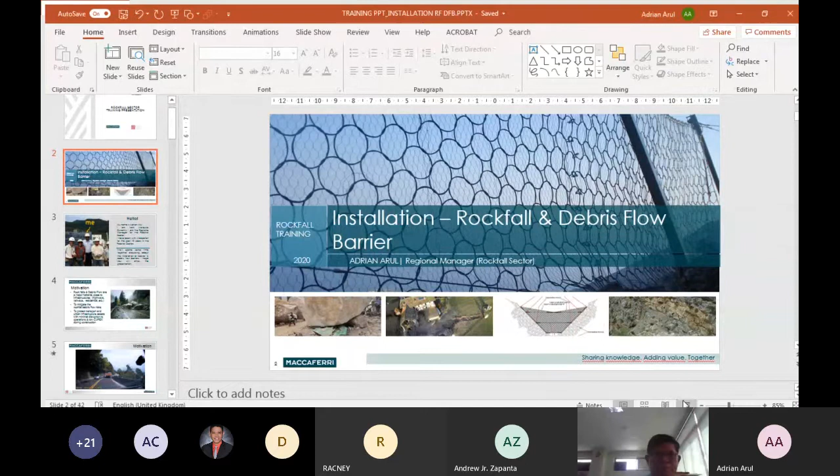Okay, can everybody hear me? Good morning to you. Yes, good morning. Okay, now I know you can hear me.

As Andrew mentioned, today I'll be presenting a Rockfall training. For some of you, this may be a refresher course, and some of you may be new to this. But the topic today is purely about installation of rockfall and debris flow barriers.

Andrew introduced me, but I'll just say a few words about myself. My name is Adrian Arul and I'm from Malaysia. I've been with Maccaferri for the past 10 years in the rockfall sector.

Today, as mentioned earlier, we'll be discussing the installation of rockfall barriers and debris flow barriers. I hope you will enjoy the presentation. Feel free to ask any questions, and I will answer them to the best of my knowledge.

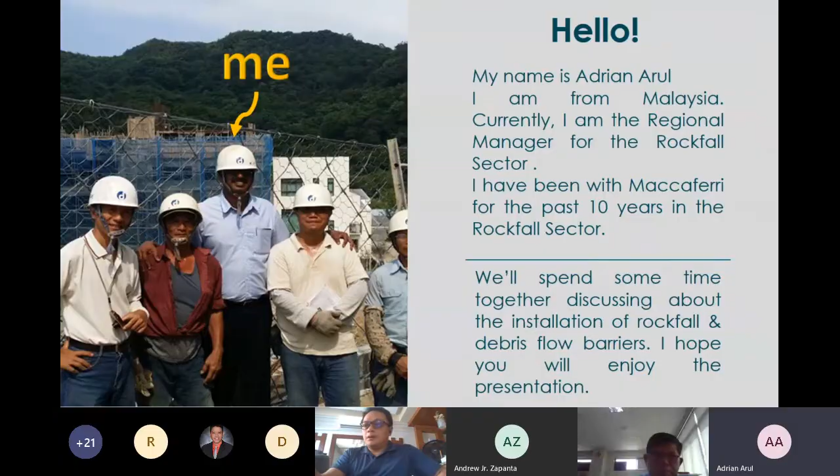Firstly, some introduction: what is the motivation for us to install rockfall and debris flow barriers? Basically, mainly it's to protect infrastructure, especially in hilly areas such as highways, railways, and also urban areas and urban development. The purpose of rockfall and debris flow barriers is to mitigate the risk and protect the transport and urban infrastructure assets. If we use debris flow and rockfall barriers, basically it is a kit, so you will have minimal disruption to your operations with this kind of solution. And this kind of solution provides low capital cost expenditure compared to other rockfall solutions, especially during construction.

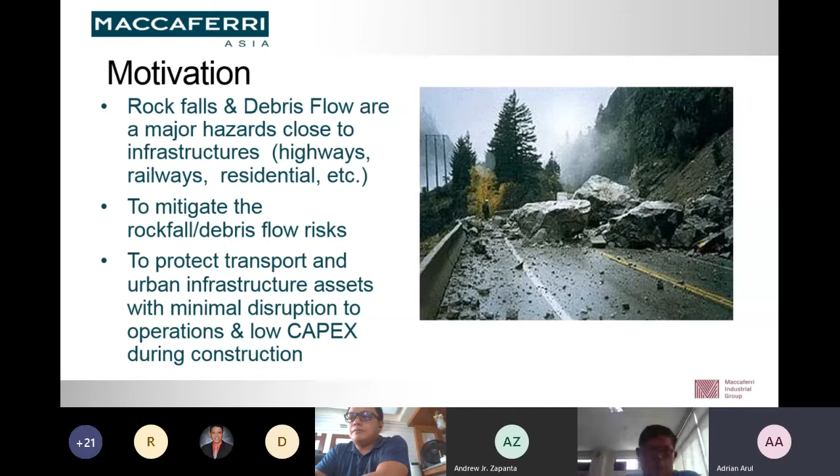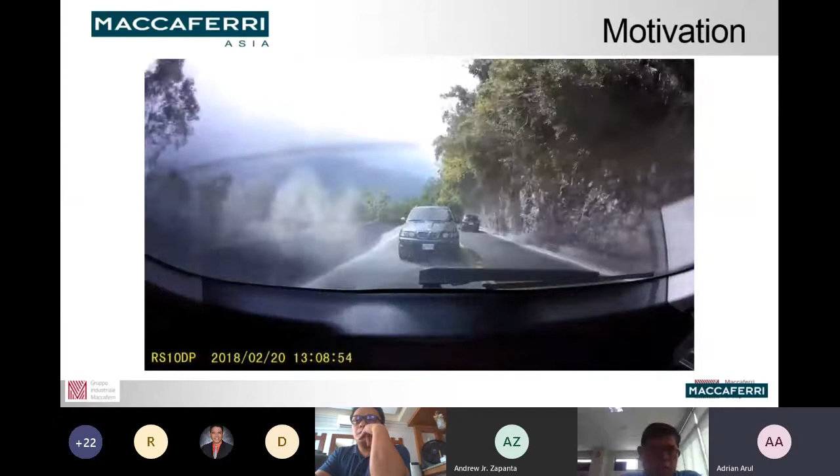Now, I think many of us may not have first-hand experience with rockfall incidents, so I thought I'd give you a video of an online rockfall experience. This is actually a video from Taiwan. You see, this is a rockfall incident. This is a near miss - luckily nobody got hurt in this incident. This area is actually prone to rockfall.

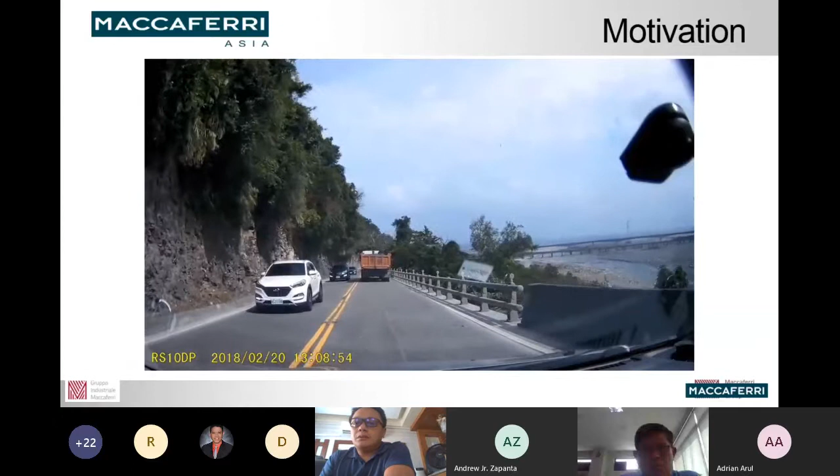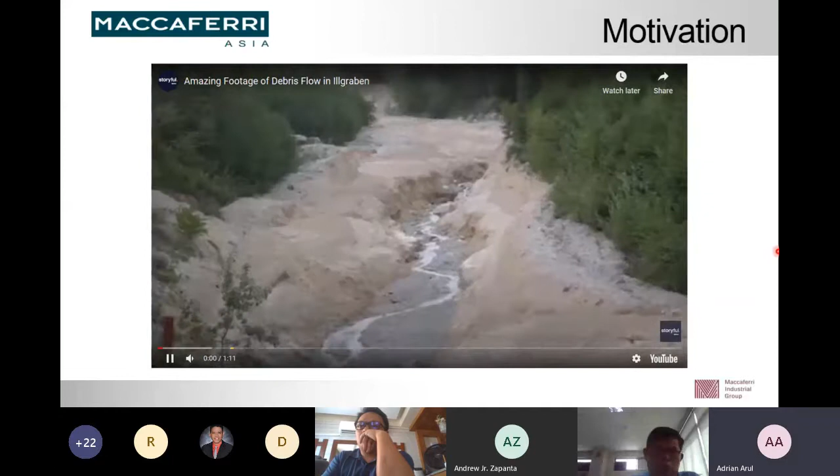This is a YouTube video that shows how debris flow looks like.

So there's a couple of things I want to highlight before I start my presentation. The presentation is based on the following premise: firstly, we cover the best practices for installation of rockfall barriers, which applies only to Maccaferri rockfall barriers. Number two, there are different types of Maccaferri barriers, meaning different energy levels. We have barriers from an energy level of 100 kilojoules, which is our lowest, right up to 8,500 kilojoules. Each barrier has a different makeup and different components, so it's not possible to go through them one by one since there are so many components and configurations.

But we can always refer to our installation manual as a guide on how to install. So the installation recommendations presented today are basically a general concept based on the experience we've had throughout these years.

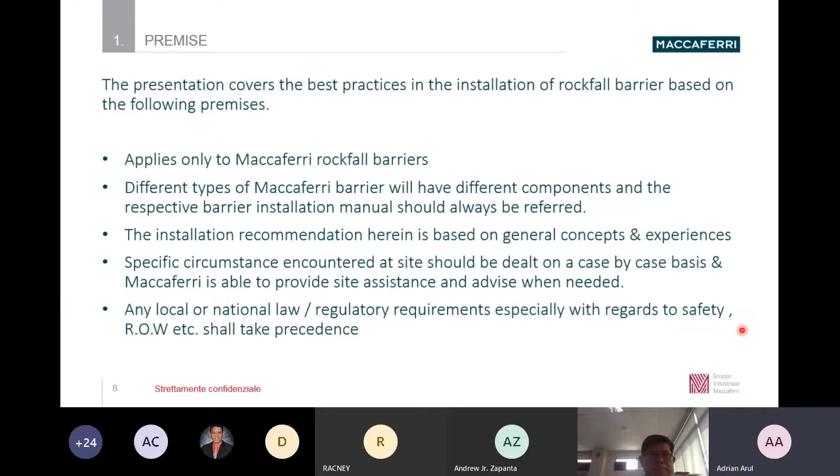Now, the first thing I would like to emphasize is safety during installation. There are a lot of safety issues, right? I've just taken some important ones that are usually encountered at site. Number one, we should always have a qualified person supervising the installation. At least the person should be well read on the installation manual, which will be given on request to the installers. Please read this carefully and take cognizance of all the important points that have been highlighted in the installation manual.

Number two, you must take additional extra precaution, especially during tensioning and installation of ropes. This is a very important part of the installation. Please make sure no persons not involved in the tensioning works are within the hazard area.

Number three, removal of tension parts shall always be avoided. For example, you have ropes and you are tensioning them, then installing the wire rope grips on the ropes. Once you install it, please do not try to open it again. That is a very dangerous thing to do. So always try to get the job done right the first time.

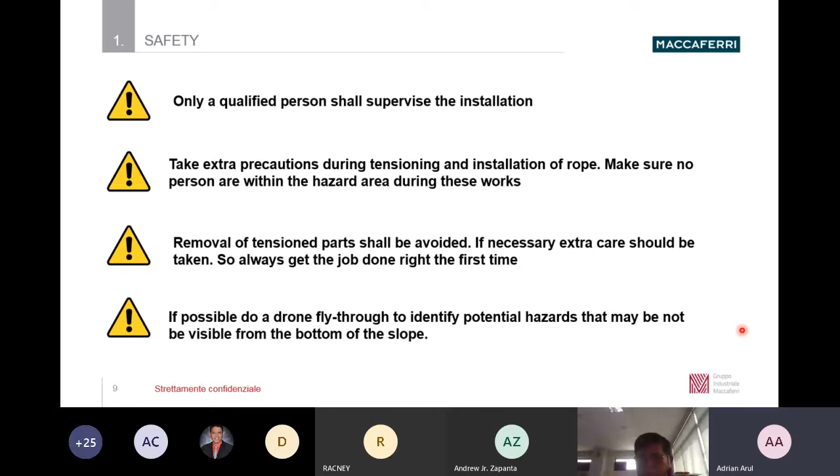Another thing, if possible, usually you will install your rockfall barrier near the toe of the slope. Sometimes potential hazards at the top of the slope, at the crest, are not visible from the bottom of the slope. So I advise if you have drones, please do a fly through, so that you may know if there are any dangerous rocks, boulders, or outcrops at the top, because during installation these may come down. A drone fly through gives you a visual assessment of any hazards at the top of the slope.

Now we go into the topic of the day: number one is the installation of the rockfall barrier. Basically, the general configuration of a barrier is as shown. You have support cables, longitudinal cables, upper and lower longitudinal cables, and lateral cables. In some barriers, you don't have these upslope cables.

We have two kinds of barriers that don't have these upslope cables: our 100 kilojoule barrier, the RB 100 UAF model, and our 500 kilojoule barrier, the RMC 050 ICAT/2 model. These two models do not have the upslope bracing cables as I'm showing here. But the rest of the barriers, from our 1000 kilojoule right up to our 8500 kilojoule, have these upslope cables and anchors. Next, all barriers will have posts.

All rockfall barriers will have posts, and all rockfall barriers will have what we call interception screens or nets. This also varies from barrier to barrier for different energy levels. For a lower energy level, our 100 kilojoule barrier uses just wire mesh. Then we have our 500 kilojoule and our 750 kilojoule, which use HEA panel, a wire rope mesh, usually combined with wire mesh. Then the higher energy levels use ring net panels, combined with wire mesh.

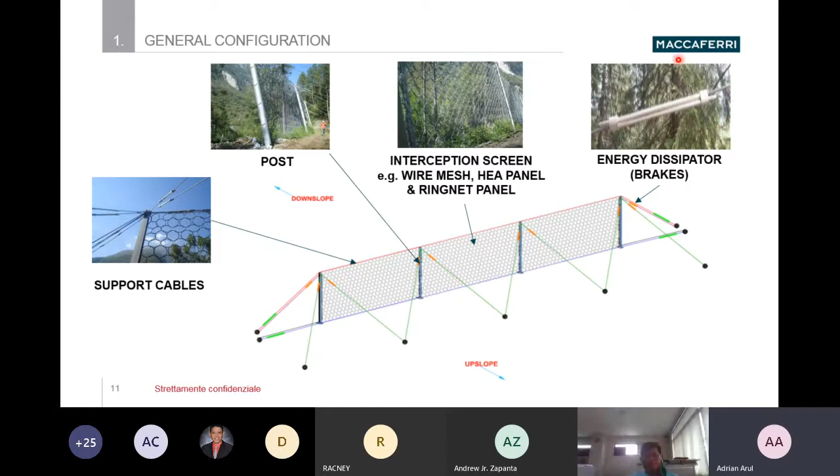Care should be taken during handling at site, because sometimes people just throw it to the side and don't take care of it, and they may damage these energy dissipators. If the energy dissipator is bent, or if there is a kink in the tube, it might not work as it's supposed to. This particular component is a very important component in our barrier.

There are two major parts of work to pay attention to when installing. One is the setting out of the anchor position and alignment of the barriers, the post position and the anchor position. Another is the installation of all the components: the post, the base plate, the ring nets, the ropes, and so on.

For the setting out, it's basically survey work, and you need certain tools. Basically a measuring tape, preferably 30 to 50 meters, a hammer, a spray can, preferably red so it's quite visible, and wooden pegs to mark out all the anchor positions and post positions at site, along with the installation manual.

The construction drawing may give you more details, like the length of the anchor that you're supposed to drill, and so on. For installation work, these are the basic tools you need.

You need a ratchet wrench. If possible, you can also use a power wrench, a socket wrench, and torque wrenches for tightening the U-clamps. Also a cable cutter, disc cutter, pliers, and an inclinometer.

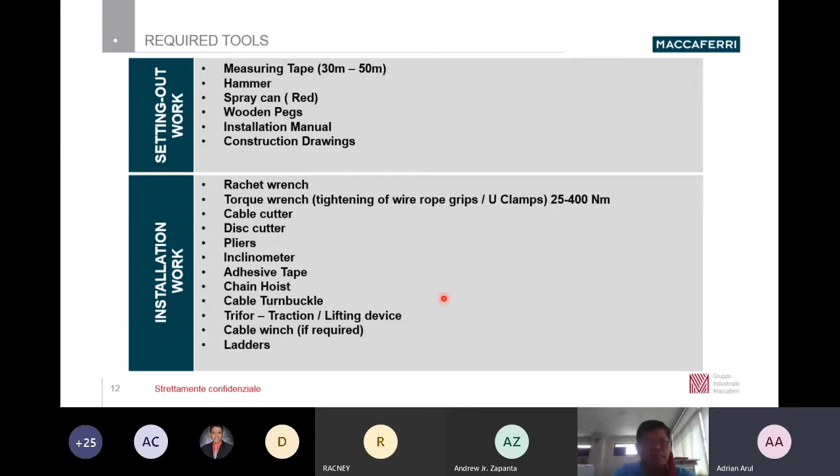You can use cable winch and ladders to fix things. I will show you some videos later about some installation.

Another issue we sometimes face is because we usually work in remote places, unloading material could be a problem. Sometimes you can use a lorry crane to transport your materials from your factory or site office to the site, or from your storage area to the site.

You can use a lorry crane to offload the packages. You can use a crane sometimes to lift posts and heavy materials if it is within the reach of the crane.

Some use excavators, especially in terrain where they don't have proper roads and access, and they don't have the facility of a crane or lorry crane to lift up things - they use excavators.

In the last photo here, you see that sometimes they don't have excavators, and because it's a very remote place, you can have this kind of fork attachment to your backhoe or something like that. It will help you offload posts from the lorry - this could be an option for unloading material.

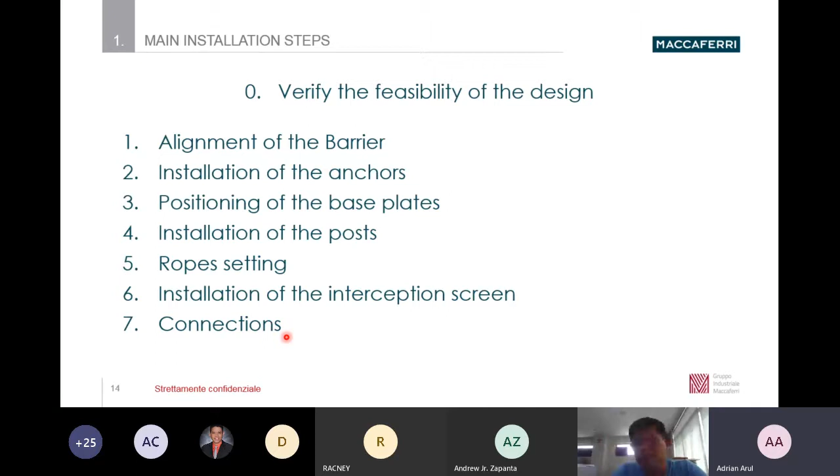Then you can install the ropes, the support ropes. Then you install the nets, the interception screen, and then you do all the connections - the U-clamp, the U-shackle, and all the accessories.

Now I'm just going to show you a video of the basic steps that I've mentioned in the previous slides.

This is our partner in Hong Kong. We have done a video with them on the installation, just to show and educate on the steps to be taken during installation. This is for a 3,000 kilojoule barrier.

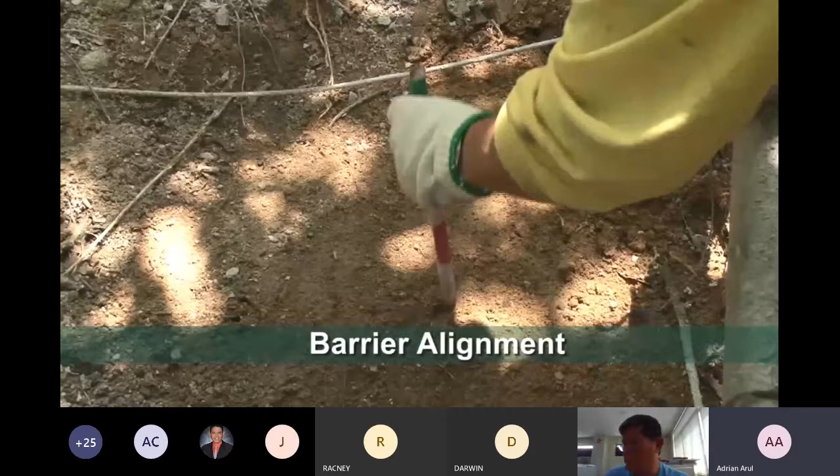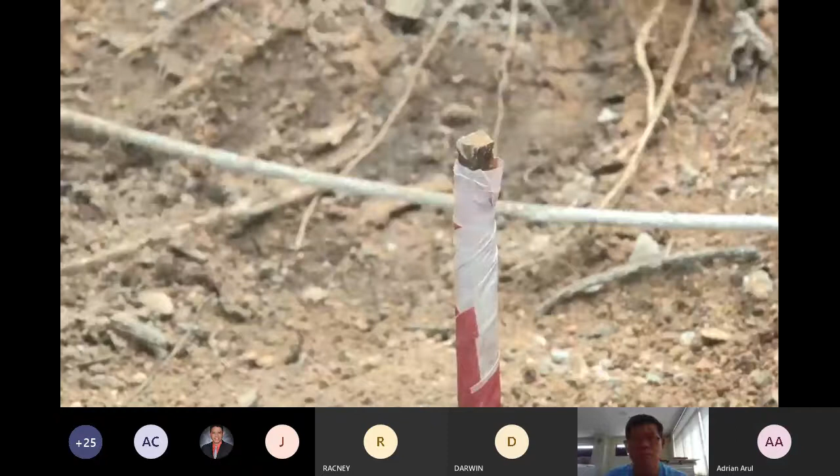So the first step is to do the alignment, mark all the positions of the posts and the anchors. Usually the post-to-post spacing is about 10 meters.

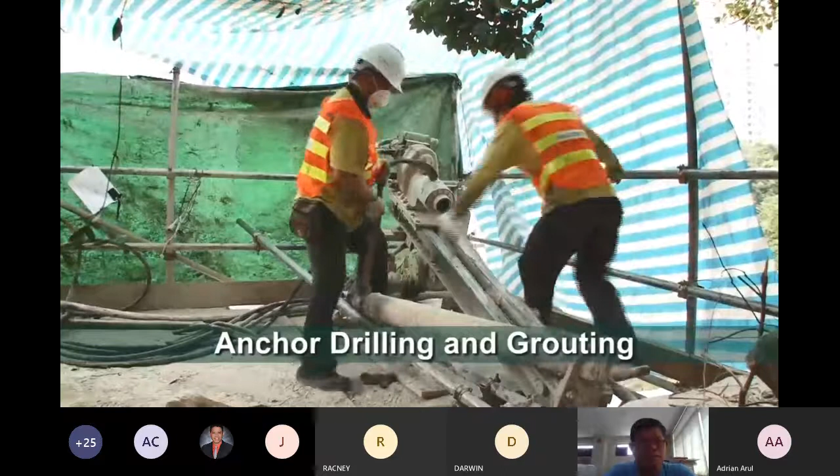This is the grouting and drilling part. They are using a down-the-hole hammer, percussion, and so on.

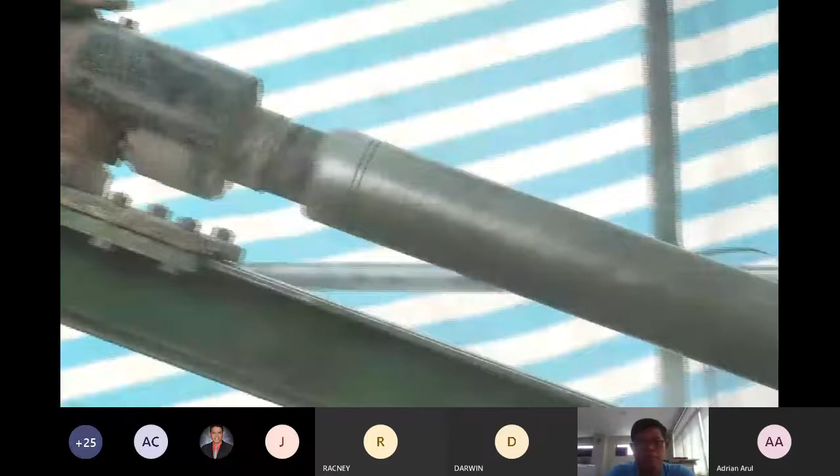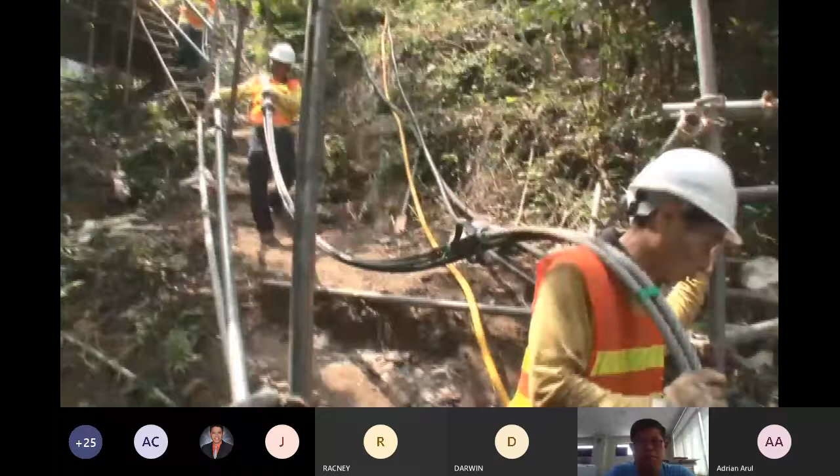This is installing the anchors and grouting anchors.

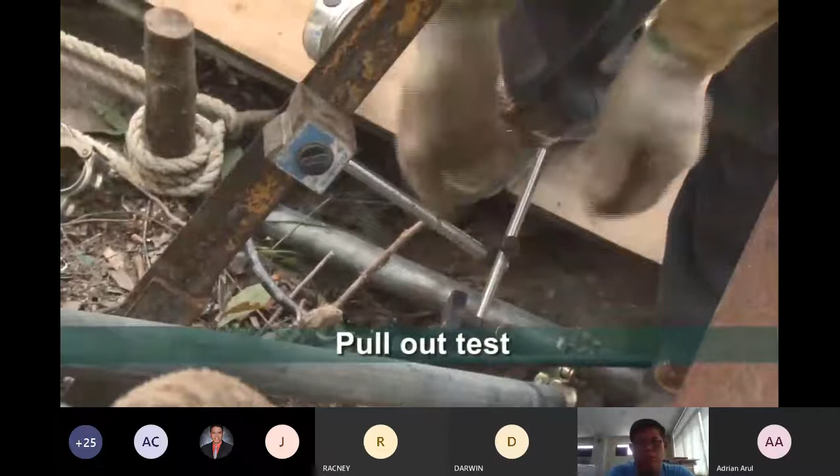Then we have the construction of the plinth.

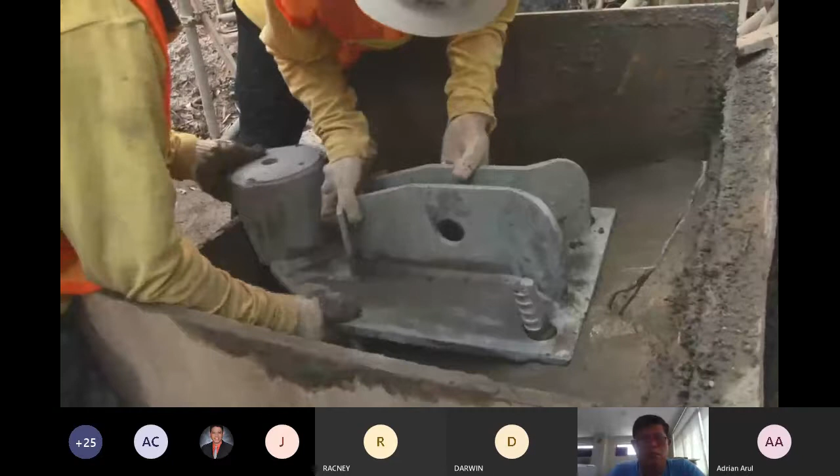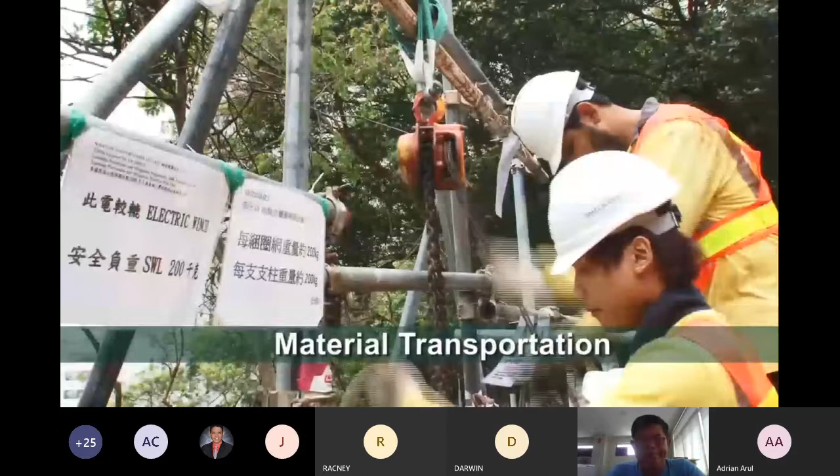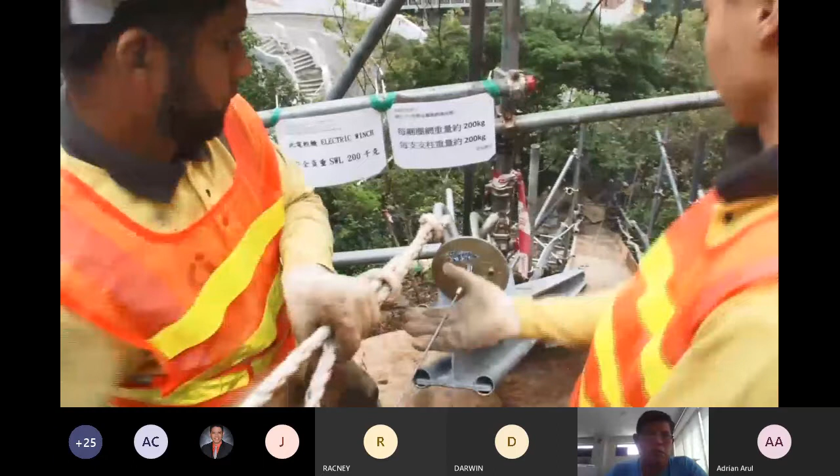Then because of the site condition, they need to use a winch to transport posts, base plates, and material.

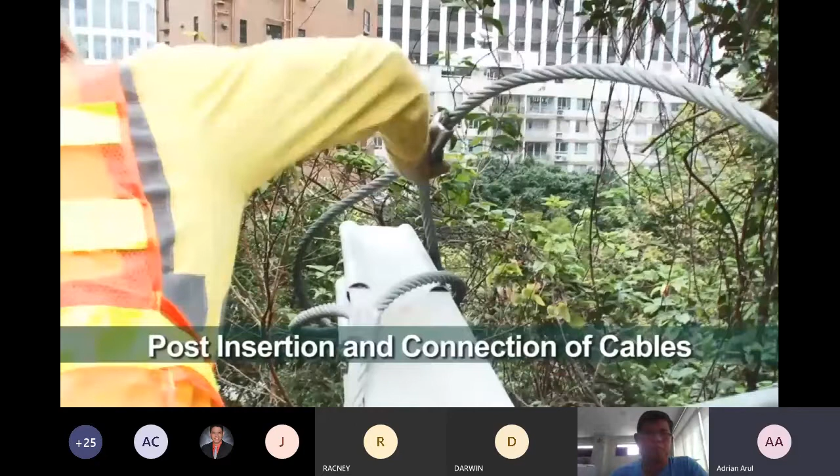This is the installation of the post. And what they are installing is the upslope cables.

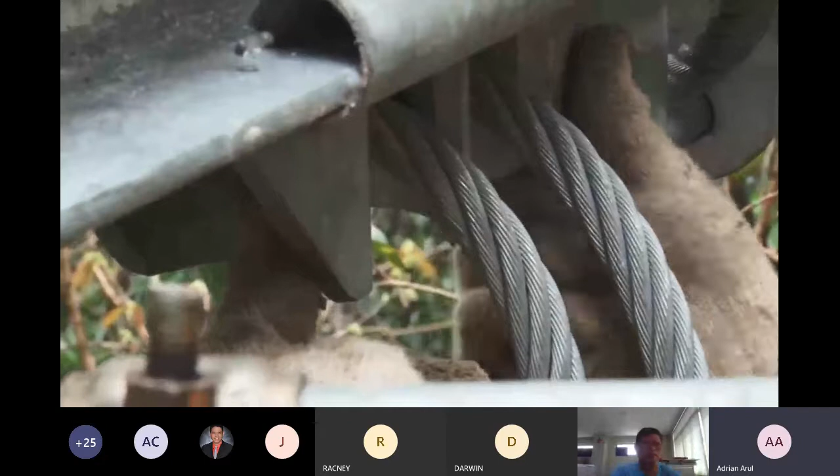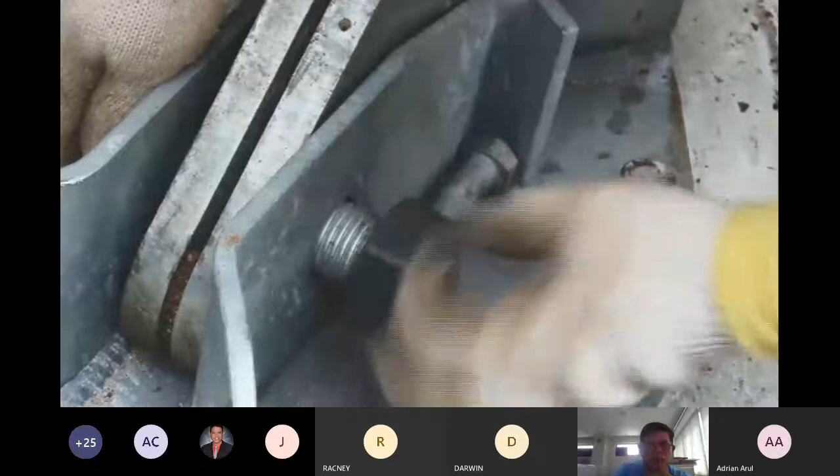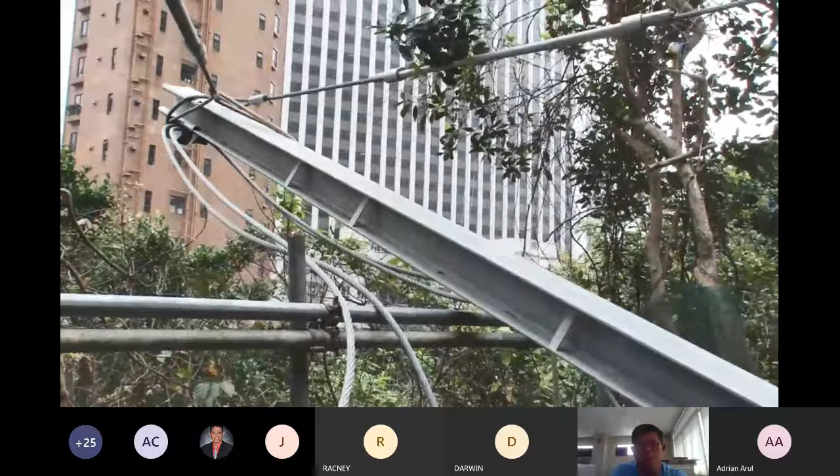Once they slot in the post, they slot in the bolts. Then they use the upslope bracing cables to lift the post to position.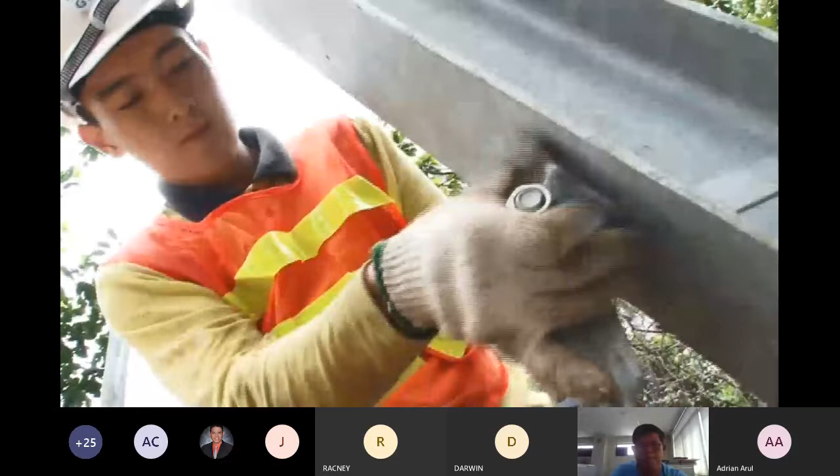This is an inclinometer to ensure that you have the correct inclination on your post. This is called the turnbuckle device.

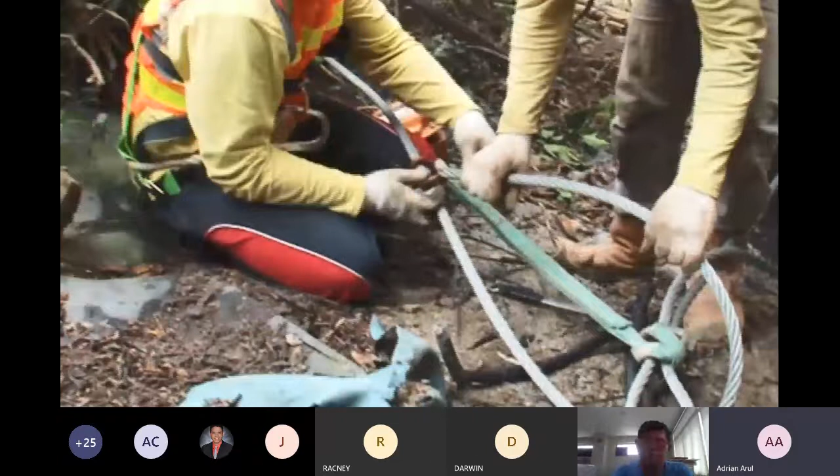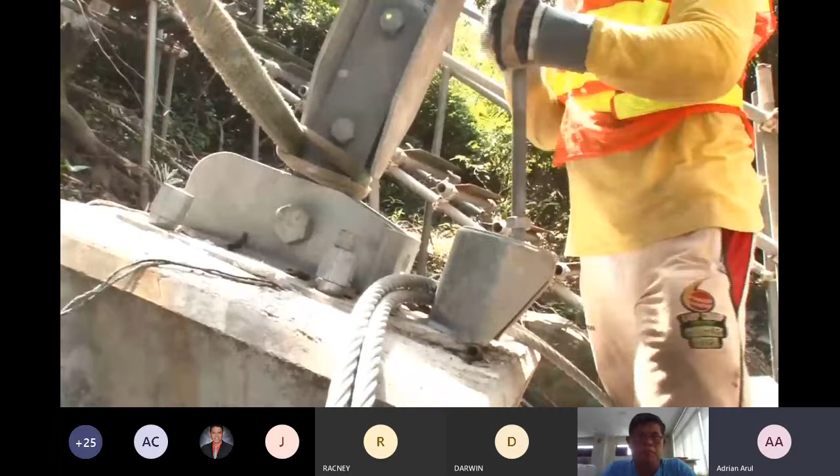And they secure the bracing cables using the U-clamps or wire rope grips. This is the energy dissipating device. This is fixing the lower cables.

Next, we look at the installation of the ring net, the wire mesh.

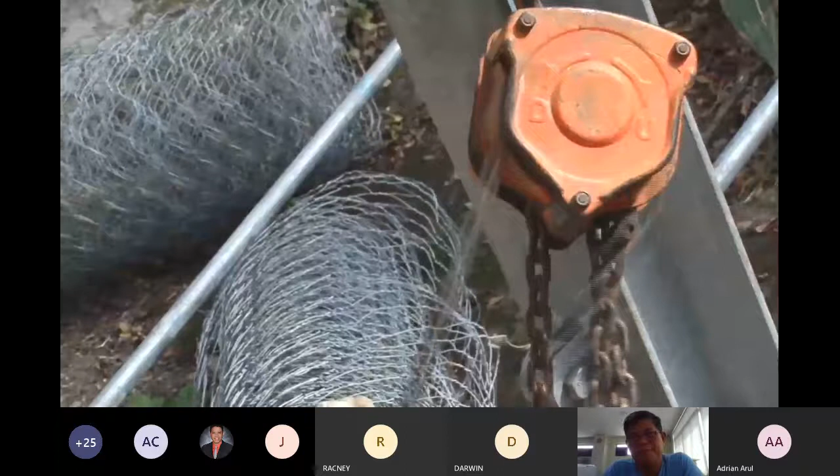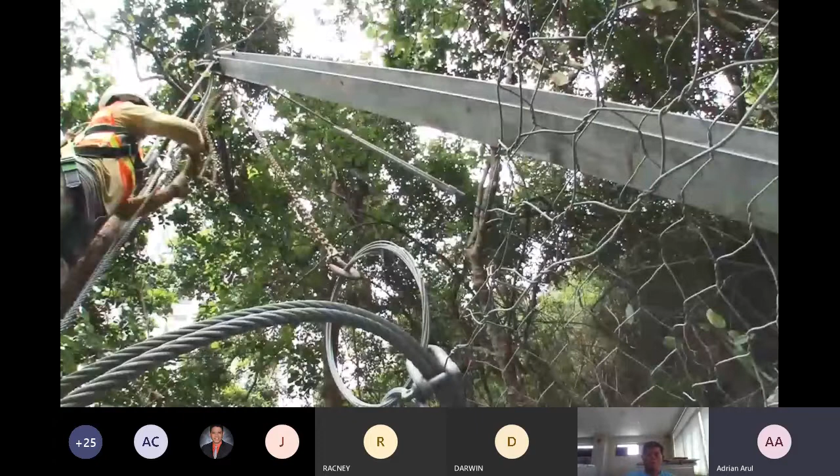So once all the ropes are secured, then they start lifting the ring net.

This is the lateral cable. This cable is the side of the net, the last panel. This is a picture overview of the site that is completely installed.

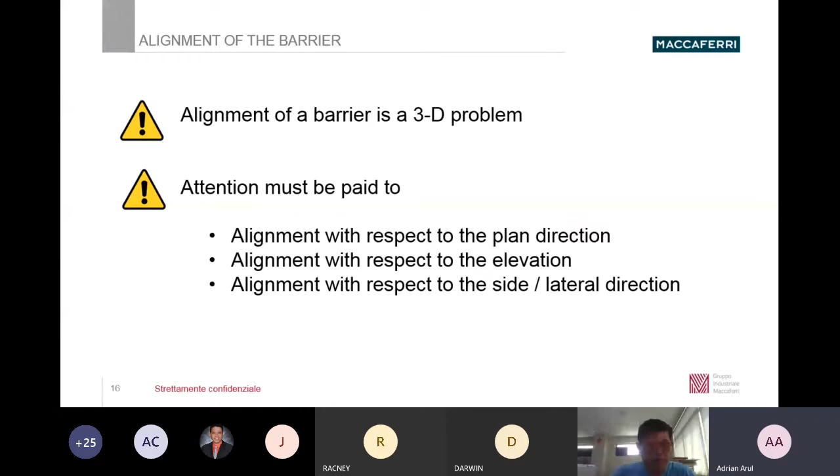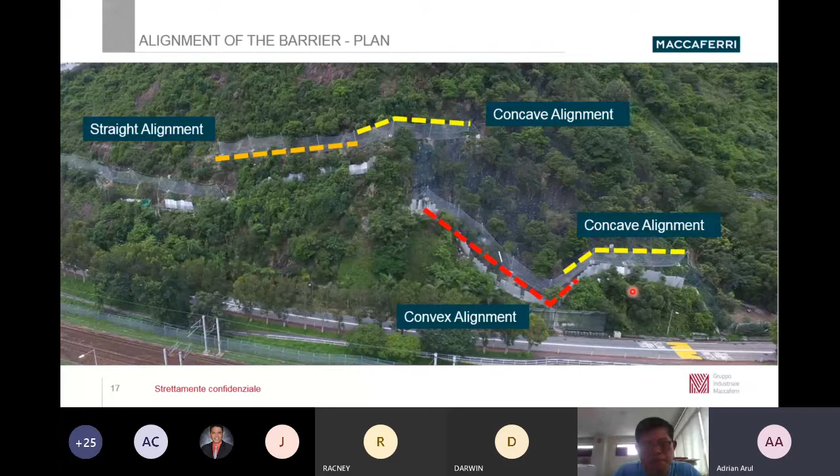Now, basically, in alignment of barriers, you will have these 5 general scenarios. First thing is you will have to set up your lateral or intermediate posts. So the posts will have lateral and upslope ropes and anchors. The positions are all given in the Maccaferri installation manual for different types of rockfall barriers, so you can refer to them.

Second scenario is what I said, the convex alignment, when your post moves to the downslope side, towards the valley side. When you have this condition, you have to put an extra cable, anchored at the back, what we call a downslope bracing cable, to support the post.

Third scenario is you may have a very long barrier, a long straight length. That may be an installation problem because you have very heavy ropes. You are not able to pull—say you have a barrier of 80 or 90 meters—and you are not able to install the rope from one end to the other end. So what we can do is use what we call a shed post detail to break the continuous alignment for ease of installation.

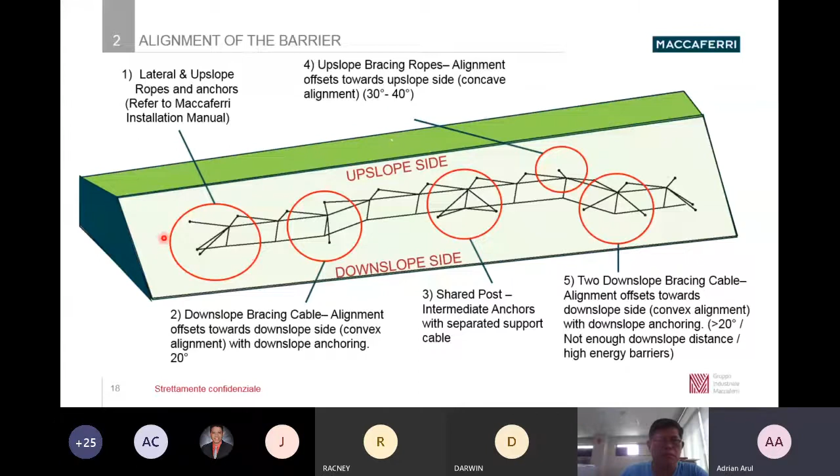Now for case one, the plan looks like this. You have the post here, and the yellow circles are the upslope bracing cables, and the red circles here are the lateral anchors. The yellow is the upslope anchors, and the red is the lateral anchors.

You can see generally the distance between the upslope anchors is about 10 meters. But the offset distance from the upslope anchor to the alignment varies, shown here as dm. The distance between the post and the lateral anchors also varies. These are dependent on the height of the post.

When the post height differs, your dm and dl may vary. So these dimensions are given for the RB 1500, our 1500 kilojoule barrier, but these values will vary from barrier to barrier, because different barriers may have different post heights. So you need to look into these values in our installation manual.

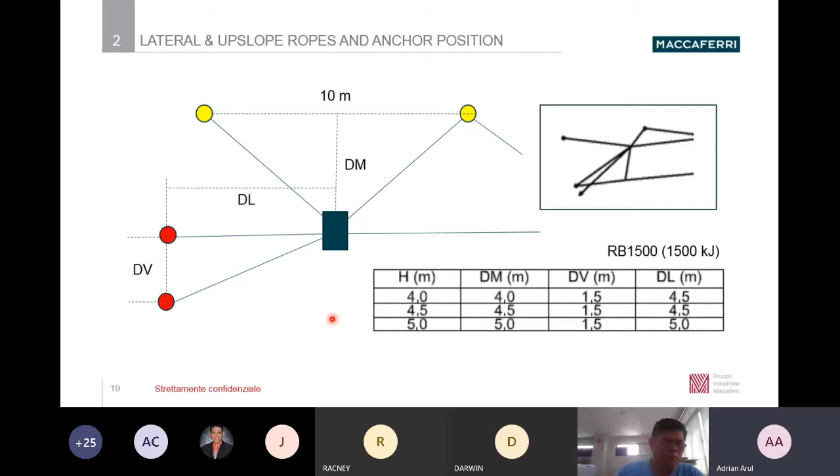Now, when your alignment changes in a convex alignment, that means your center or intermediate post moves downwards. The alignment changes from this direction and then goes upwards. This is what we call the offset angle.

If it's between 15 to 20 degrees offset angle, then you must put a downslope bracing cable. We recommend a minimum of 3 meters.

Why is this important? Because when you have this kind of alignment, these ropes, upon impact, will tension. When they tension, they will induce a resultant force that will move this post upwards. So we need a downslope cable to counter this upward movement.

This is the other scenario I mentioned, the shared post, when we have very long alignment, around 60 to 100 meters. 60 meters for higher energy barriers, and 100 meters, one continuous section you can do without a break for low energy barriers like our 100 kilojoule, then there's no problem. We have installed up to 100 meters without any shared post.

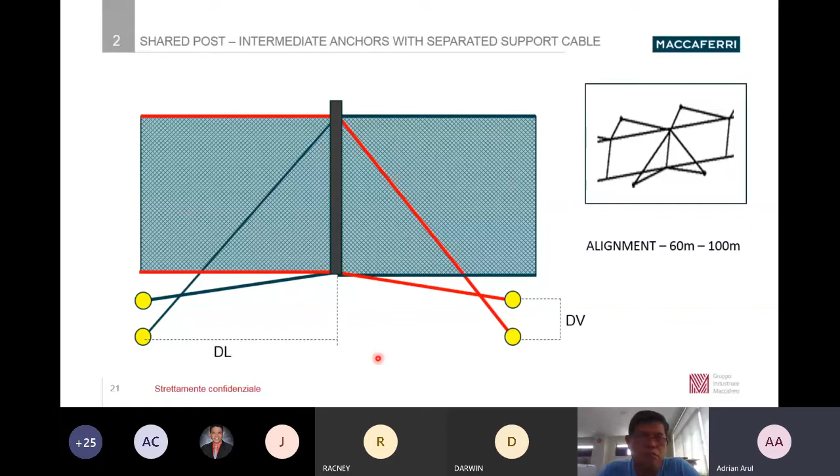Now, when you have conditions where the offset distance is in a concave alignment, that means the intermediate post moves upwards. You can see if the offset angle is very big, around 30 to 40 degrees, when the alignment goes like this.

These two, this and this, you can see it opens up too much. Because it opens up too much, you don't have any resistance on the upslope side.

So we advise that you install an upslope bracing cable with an anchor in order to give some resistance on the upslope side if the alignment angle is too big. So when you have very big offset angles around 30 to 40 degrees, we advise an additional upslope bracing cable.

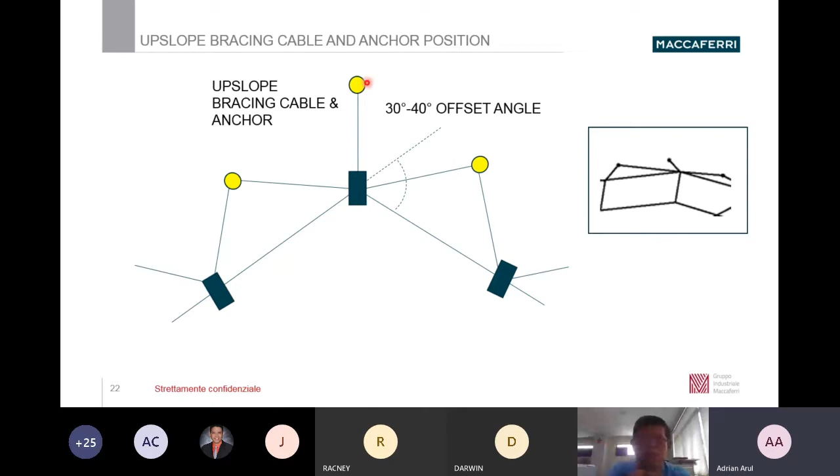Now, when you use two downslope bracing cables, as mentioned in the earlier slides, you can see when there's an impact, the cables will tension, shown by these orange arrows. When the cables tension, you have a resulting force shown by this red arrow, which will pull this post upwards. So in order to counter this, we need a resultant force shown by this green arrow going downwards to maintain stability of the post.

So we have two anchors like this. These anchors and this downslope bracing cable will provide counterbalance for the post. So minimum 3 meters, or this can be designed depending on the site condition, we can design what length is needed.

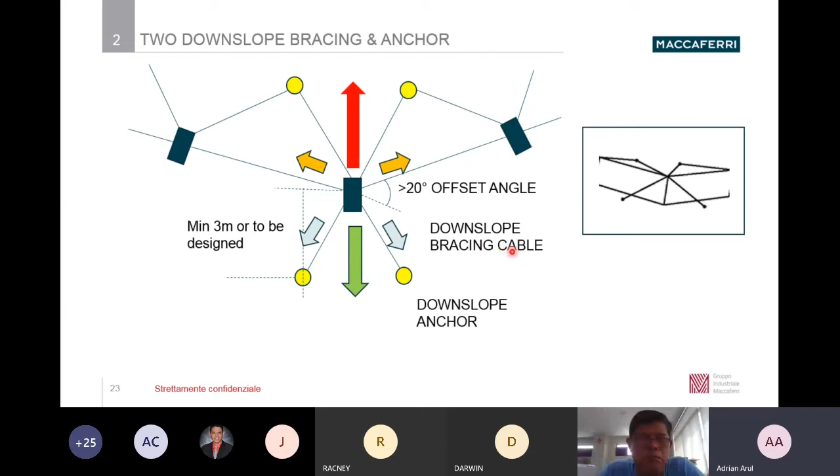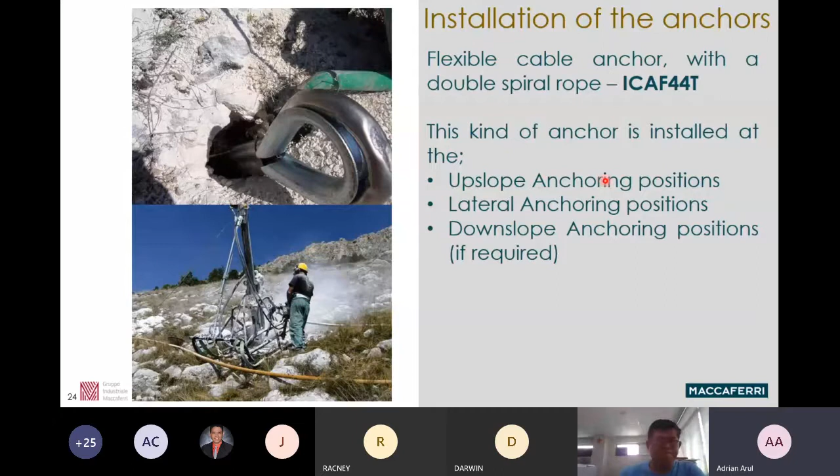Now, installation of anchors. For the upslope and lateral anchors, we usually use cable anchors, which we call flexible cable anchors, or ICAF 44T. They are made of spiral ropes, which is different from the normal ropes you see, called stranded ropes. These are more rigid and have a higher minimum breaking load compared to normal ropes. This kind of anchor is installed in the upslope, lateral, and downslope positions.

For the plates, we provide bar anchors - this kind of normal bar. Usually we provide fully threaded anchors, so the anchor comes with a thread for the whole length of the bar. So at any time, if you cut in any position, you still can install the nut. You don't have to thread or put it. That is why we use a fully threaded bar.

Now, plinths are not required on hard rock. It just suffices to use some non-shrink grout to fill up any gaps between the plate and the rock. On hard rocks, you don't need to have plinths. But in soil or weathered rock conditions, we recommend you use plinths because later there may be some scouring underneath the plate.

For the installation of posts, you can use cranes or helicopters, and sometimes it's not possible - they hoist the posts and the base plates up by hand. But the first thing is, before you can install your post, it is important that you position your base plates properly.

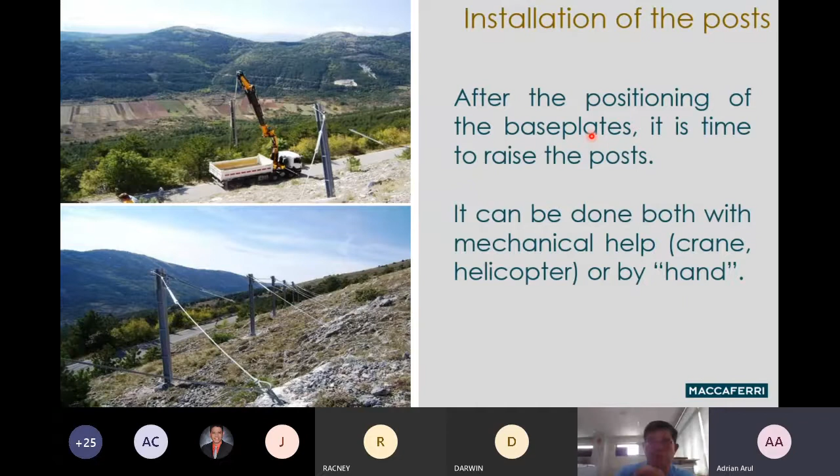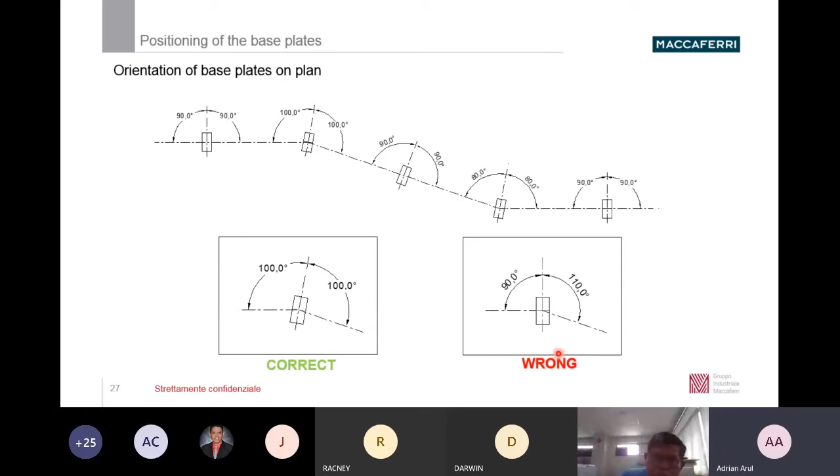Number two, next is for the base plates and the poles - most likely on sites you will have a difference in elevation. We advise that you try to avoid positioning the post with a difference of elevation of more than 0.5 meters when the post is 10 meters distance. There are two main reasons for this.

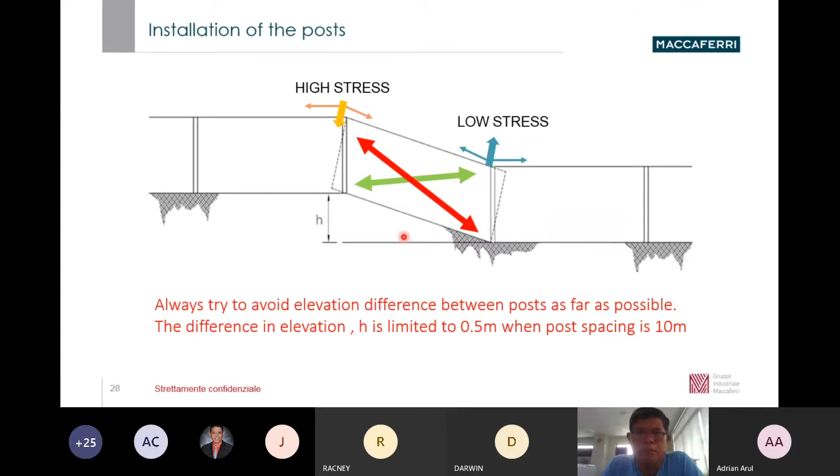So there are two problems: one is in terms of the stress distribution, and another is the dimensioning of the barrier. So what do we do? Basically, if the net is 10 meters, the post spacing is dependent on the difference in elevation - this H here - and also the post height. The post height and the elevation difference will affect the effective post distance.

Until 0.5 meters, we have a tolerance, so you don't need to change the post spacing. But once it goes higher, 1 to 1.5 meters, the post spacing may need to be brought closer for a 10-meter net length.

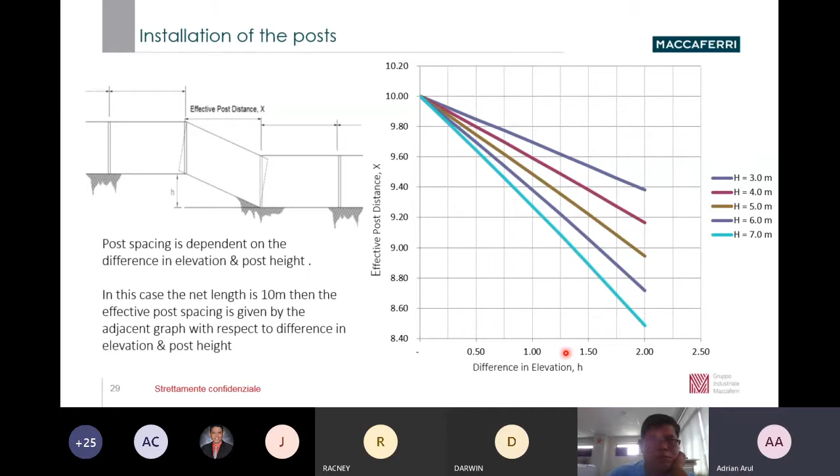Now, another important aspect of installation you need to pay attention to is the inclination of the post. Phi here signifies the inclination of the post, and it is dependent on the slope. The higher the slope angle, the more you will have to bring the post forward, toward the upslope direction, as the slope inclination increases.

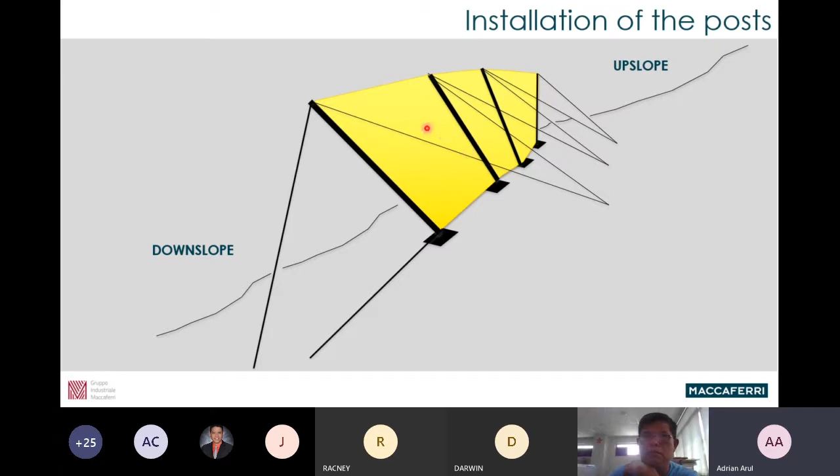Next, you must be very careful how you align the inclination. You must try to incline the post consistently. You cannot have different inclinations on different posts, or you will get a warped, distorted barrier, as you can see in this picture. When this happens, the stress distribution is affected. So as far as possible, try to have all your posts at the same inclination.

Another important thing is the upslope bracing cable. If you have enough room in the upslope direction, you can anchor your upslope bracing cable according to the installation manual, which is perfect. But in case you don't have enough spacing, say the slope is very nearby and you cannot install the anchor right at the ground, you can install the anchor at the slope area instead.

But there are several conditions you need to follow. Number one, you need a minimum 3-meter distance, so you adjust your post to achieve that. Also important is the angle—we can accept an angle between 55 and 85 degrees, but always follow the installation manual as strictly as possible. This angle is important because it governs the distribution of forces in the upslope bracing cable.

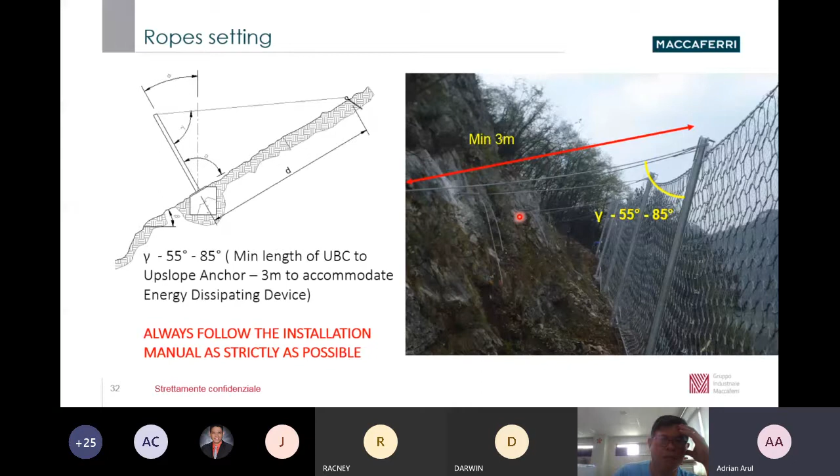Next, when you install your ring net, HEA panel, or nets, usually for higher energy levels and intermediate energy levels from 500 kilojoules up to 8,600 kilojoules, you will need 2 layers. One layer is the DT mesh, the wire mesh, and the other is the ring net or HEA. You install the DT wire mesh on the upslope side toward the mountain, and the ring net or HEA panel toward the downslope side. This is the way you should install your net.

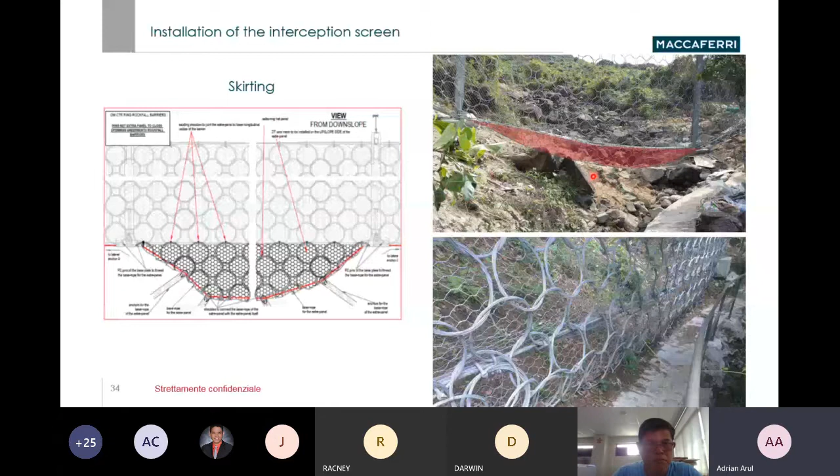So when you are installing the U-clamps on a wire rope, you have what we call the live end and the dead end. The dead end is where the wire rope is terminated, and the live end is the continuous one connected to another anchor or to another part of the barrier—this is the longer part. The dead end is the shorter part. Please remember this.

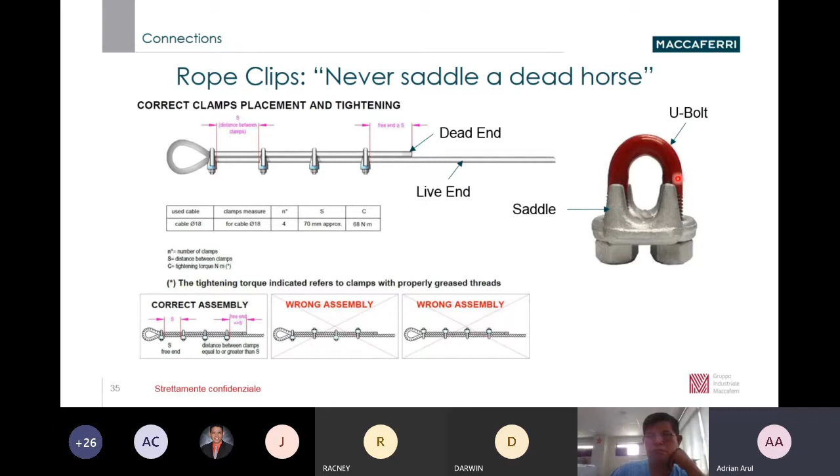Each U-clamp has a rule for the distance between different types of U-clamp, and also the torque requirement. The torque requirement is how tight you can screw on this nut. And there's a specified number of U-clamps you need to install. These are all specified in our installation manual, so please follow them strictly because this U-clamp is the one holding the wire ropes. Once this gives way, your whole net will come down. So this is a very important thing to remember.

If we go on to the installation of channelized debris flow, basically whatever I've told you for the rockfall applies to the debris flow. The alignment part is a little bit different, but basically the installation of the post, the base plate, the anchors, the wire rope clips, mostly both are more or less the same.

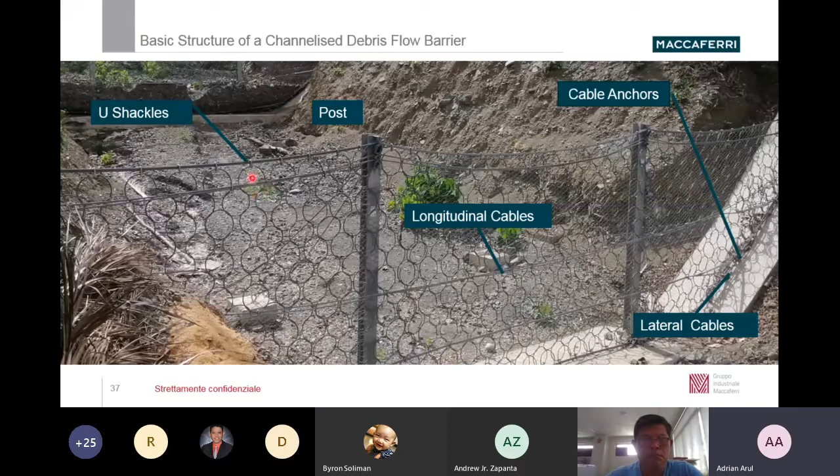And then we have what we call the lateral cables. Then we have the U-shackles. U-shackles are used to connect the ring nets to the longitudinal cables.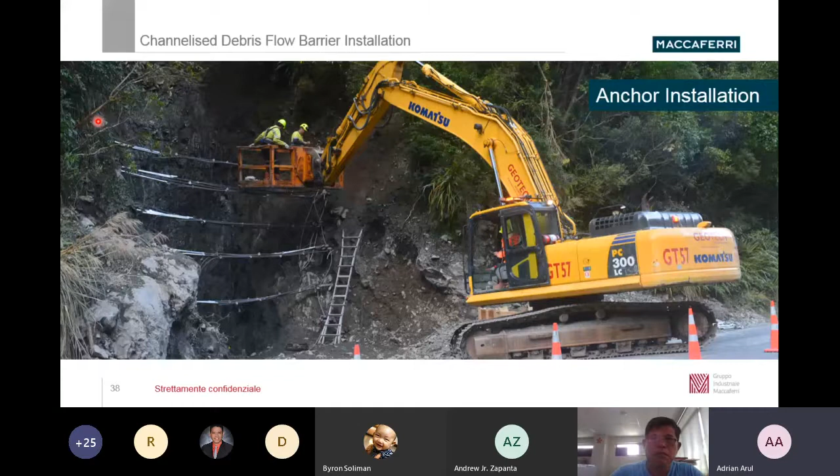This is basically the steps. First thing is you have to install your anchors. As experienced installers, you know the procedures, but I'm going over this for those who are not very familiar. You have to install the anchors, and then after that, you install your longitudinal cables. We provide installation manuals to show you how to do this.

Be careful when you are installing your longitudinal cables, because in debris flow, the longitudinal cable comes attached with an energy dissipator, a brake. So when you are tensioning, don't tension too much because you will activate the energy dissipator. As long as it is taut and tight enough, it's good.

Always, during tensioning the ropes, it's better to have one guy watching the EDD. One guy is tensioning the ropes, another guy should watch if there is any movement on the energy dissipating device. So basically, this is the setup.

Then you put the ring net, and we use shackles, or sometimes we can weave the cables through the ring net. So you can use the shackles to connect the ring net, or you can do the horizontal ropes.

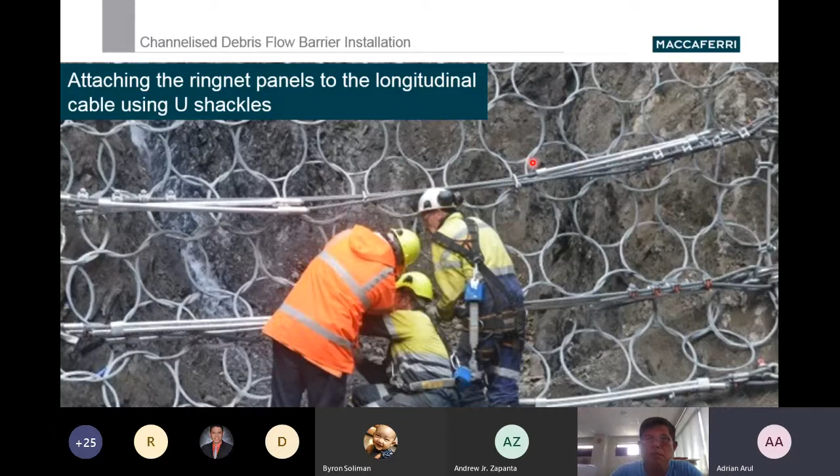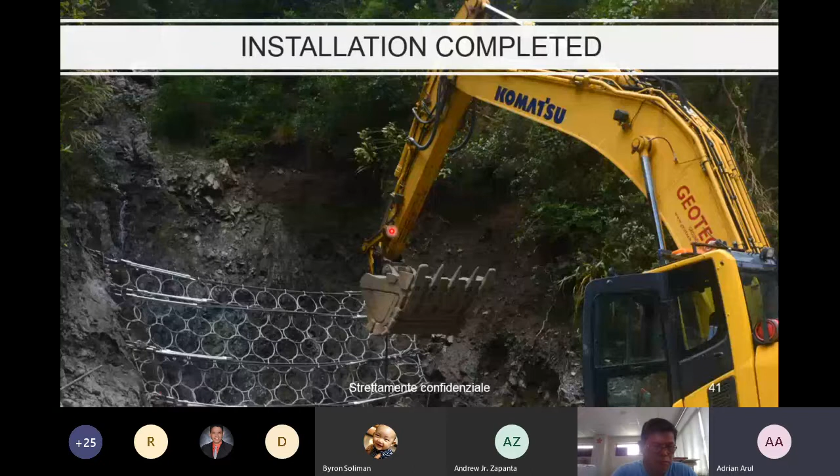Then this is a picture of a completed project. This is actually a debris flow barrier in New Zealand, at a point called Starvation Point in the southern island.

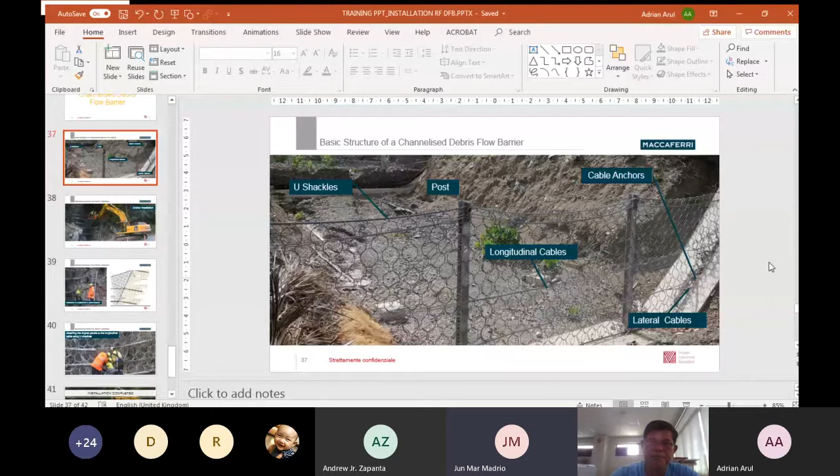Okay, thank you for that. One of the main problems we encountered is the quality of the soil. As you can see in the picture, it is sandy, and we cannot anchor it properly on the sides of the channel. That is why it is very hard for us to make a hard point to anchor our cables. So what we did is put additional concrete on the sides, reinforced concrete, and then additional anchors. We drilled a lot so that we can have a fixed foundation for the debris flow. Every time we excavate, the sandy soil collapses, so the reinforced concrete helps a lot as additional reinforcement for the foundation.

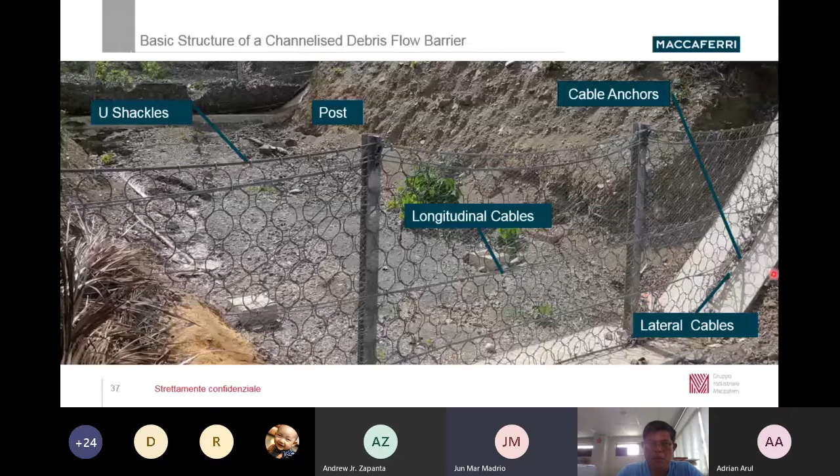Hello? Yes? Thank you, Jun. Good to hear.

Adrian, hi. Michael here from the technical team. Yes, Michael. In relation to our topic of foundation, I have a question. In some of our manuals there are two options for the position or orientation of our threaded rods, which our clients may encounter. One is perpendicular to our base plate, and another option is where the threaded rod facing the upslope side is angled. What are the advantages of each option, and how does it affect installation? Because I know some of our contractors have a hard time installing the base plate if it has an angled orientation on the upslope threaded rod.